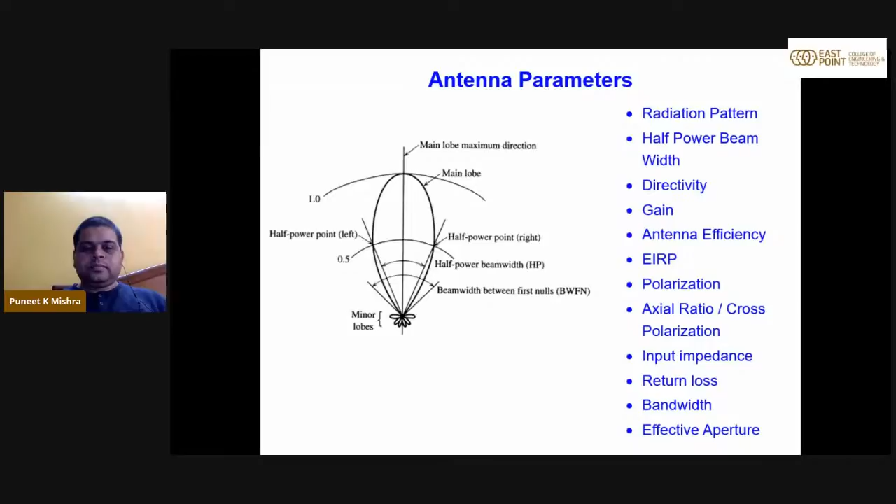Another very important definition is polarization of a wave. Polarization is important in a space antenna system because when defining polarization on ground, it is the instantaneous vector of the electric field. When it is parallel to the earth, it is called horizontal polarization. When it is vertical to the earth, it is called vertical polarization. But when this instantaneous vector of the E field generated from the antenna is parallel to the equator, it is called horizontal polarization in space, and when it is perpendicular to the equator, it is called vertical polarization in space.

So when mounting these antennas on the satellite, the reference for defining polarization is very important. We have to see how my antennas will be located with respect to equator when the satellite is in orbit, and how my launching probe will be there with respect to equator. Accordingly, we have to define the polarization ports on the antenna. And suppose by any chance polarization is reversed — H becomes V or V becomes H — then the entire satellite cannot be used. Why? Because the International Telecommunication Union (ITU) assigns the same frequency to two different users in opposite polarization.

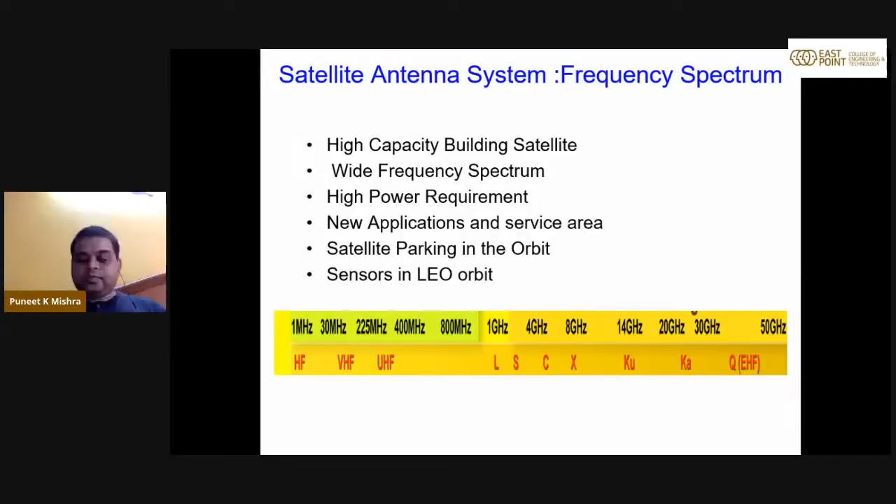So what are the challenges and opportunities in satellite or space antenna systems? First, we have to take care of adequate bandwidth, frequency range, and immunity from fabrication tolerances. You can design your antenna very nicely, but if the dimensions are such that you cannot implement them mechanically, there is no point to such a design, because ultimately you have to fabricate and fly the antenna. So any antenna or microwave engineer should be a good mechanical engineer too, or at least have the capability to grasp mechanical requirements. You should work with your fellow mechanical or fabrication engineers to know what tolerances and dimensions are achievable, and what kind of design is possible from the fabrication facility available in your lab, outside lab, or within India.

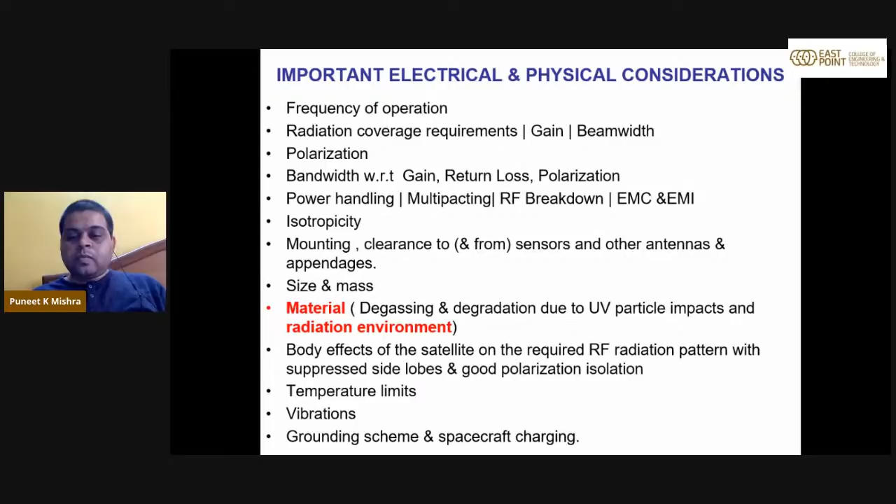Next slide, please. Yeah, most of this I have covered. You can go to the next slide. This portion is also covered. Yeah, you can go to the next slide.

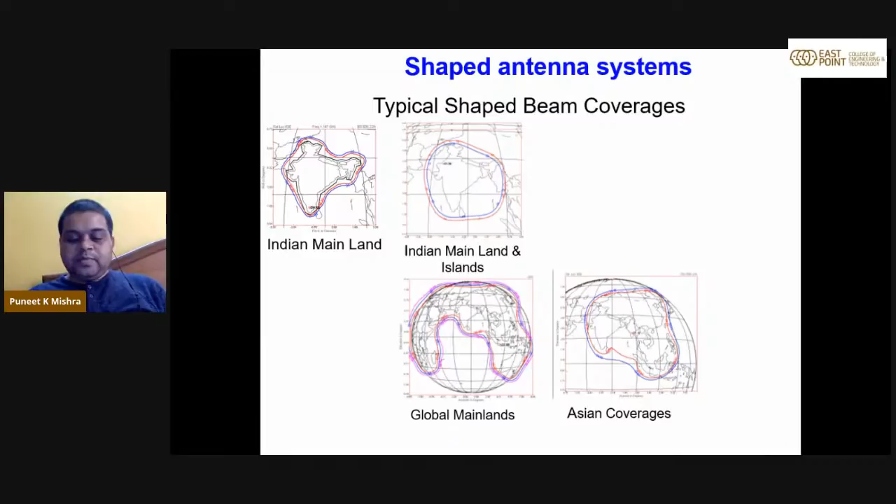Next slide, please. Now coming to how this shaping is achieved, how we are able to generate these shapes.

One should know that these shaped contours can be created by three different schemes. The first scheme is a single parabolic reflector with multiple feed networks and a beamforming network. The second technique is a direct radiating array antenna with a beamforming network. The third technique is a shaped reflector antenna with a single feed. Out of these three schemes, we have chosen the third one, because the first two techniques require a huge amount of RF hardware as well as expensive phase optimization techniques.

In space, we want to really reduce the number of hardwares as well as complexity. So we have chosen the third option, which is very simple: shaped reflector antenna with single feed. Only one feed is used, so only one RF chain is required. Complexity comes in the generation of this shaped reflector, which we have mastered now, and we are really able to shape any footprint we want. Once we achieve this, the entire RF electronics or electronic portion becomes very simple. So the third option we have used.

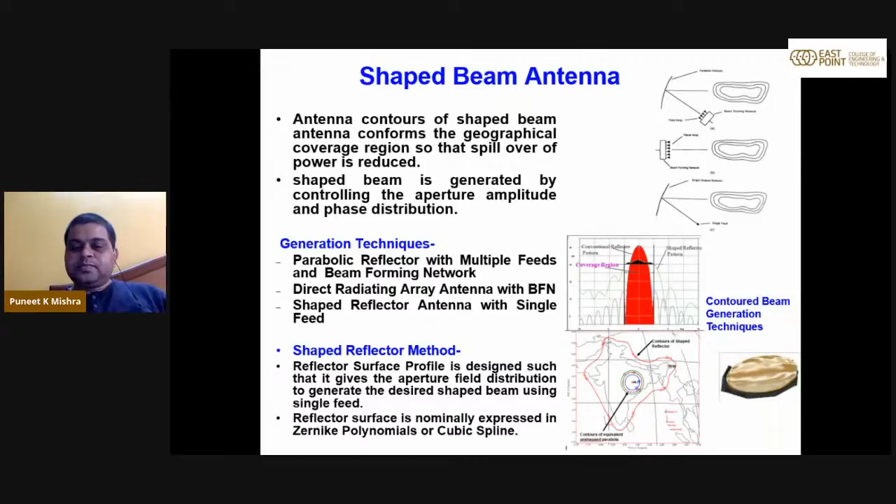Now coming to multiple beam antenna systems. The basic concept is that for any reflector there is an optical arrangement. If you put a feed at the focus of the reflector and transmit energy from the feed to the reflector, it reflects back and the plane wave energy is created in the far field, and accordingly you can generate the footprint. But if you laterally displace the same feed left, right, top, or bottom, you can shift the position of the beam.

So at the focus of this subreflector, one beam is generated. Another feed is positioned by offsetting from the focus in the lateral direction, and using this method we are able to create multiple beams using multiple feeds.

For generating multiple beam antennas, we need a feed cluster, used to generate multiple beams. Multiple beam antennas are a recent trend in communication satellite technology. They provide efficient frequency spectrum utilization, multi-fold reuse of frequency, higher EIRP, as well as higher G by T, making the user terminal very compact.

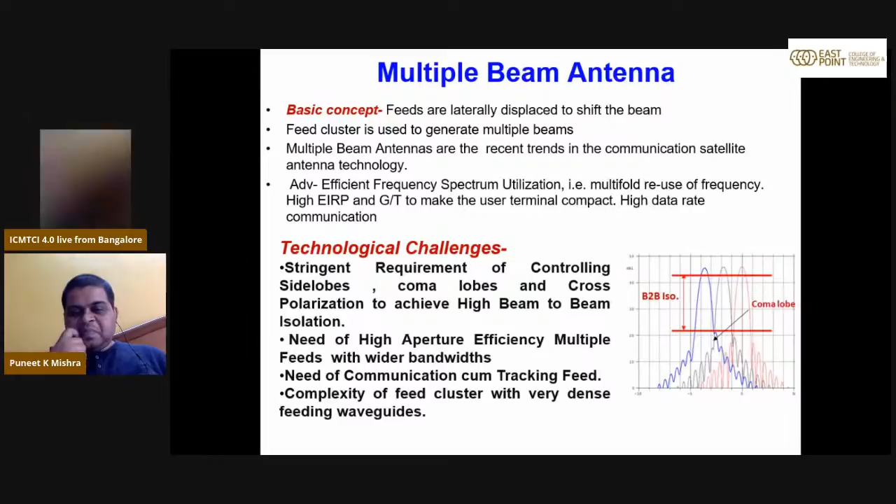You can see that for multiple beam antennas, a complex feed network is required. To cover entire India, we have 5 different feeds.

With these 5 different feeds, we need 10 different waveguide routings, since 5 are required for the transmit chain and 5 for the receive chain. For the multiple beam KU band antenna, this is the typical structure of the feed as well as beam waveguides. Next slide, please.

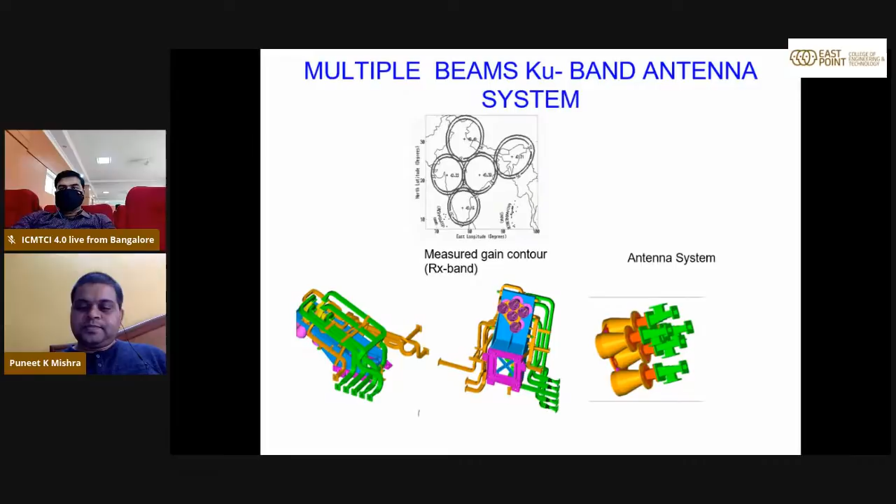Now I will slowly touch upon how we characterize these antennas, starting with an introduction to the antenna radiation regions. Microwave or antenna engineers will already know this, but for others: when any RF energy is transmitted from an RF source, initially it is spherical in nature. As it propagates it becomes cylindrical, and further out it becomes a plane wave.

In the immediate vicinity of the antenna, the fields are predominantly reactive in nature. Then in the Fresnel zone, between lambda by 2 pi and 2d squared by lambda, they are radiating near field regions, called the Fresnel zone. Once the distance crosses 2d squared by lambda, that is called the far field region or Fraunhofer region. The requirement is that the distance from the RF source is 2d squared by lambda, where d is the maximum aperture or diameter of the antenna, and lambda is the wavelength at which the antenna is designed.

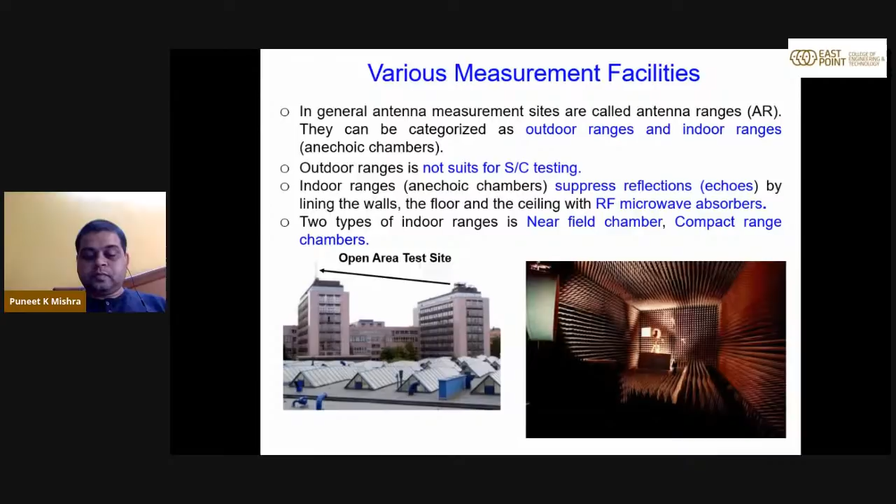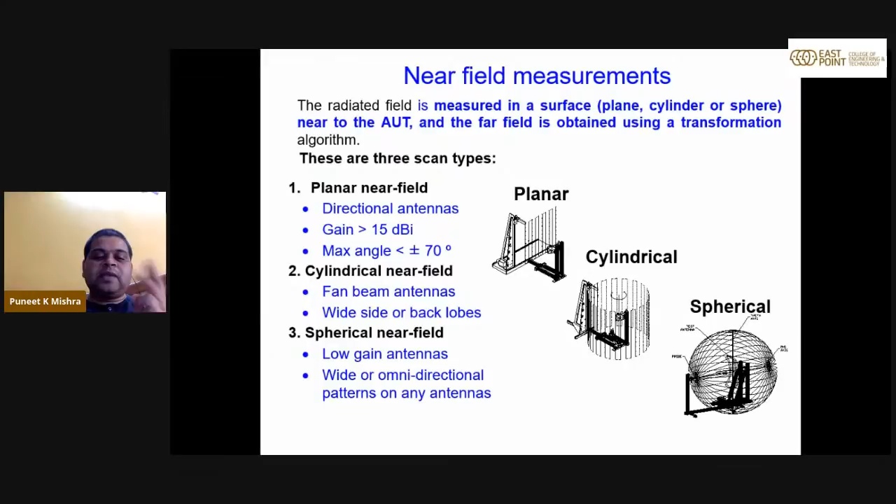Then there is another important facility called the near field facility. There are three types of near field measurement facilities. When you are measuring your test antenna and the measurement probe, they are very close to each other - they are in the near field region. When you perform measurement this way, it is called near field measurement. You can perform this measurement in three types: planar near field, cylindrical near field, and spherical near field.

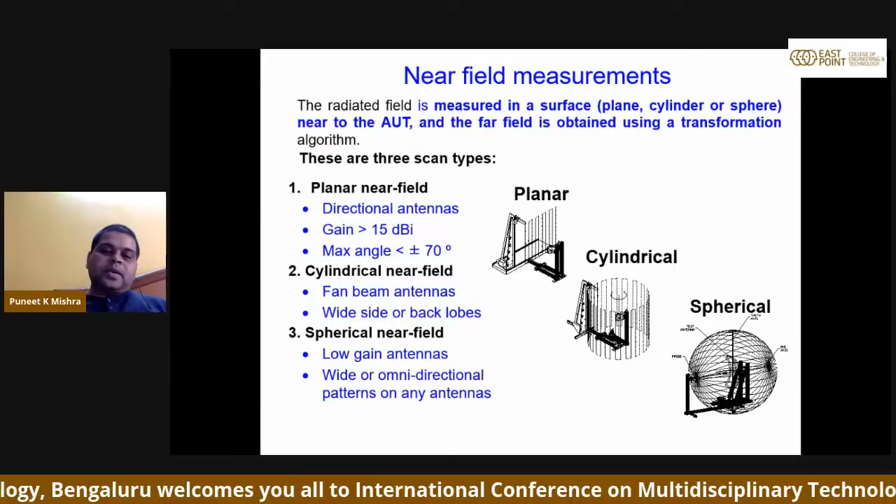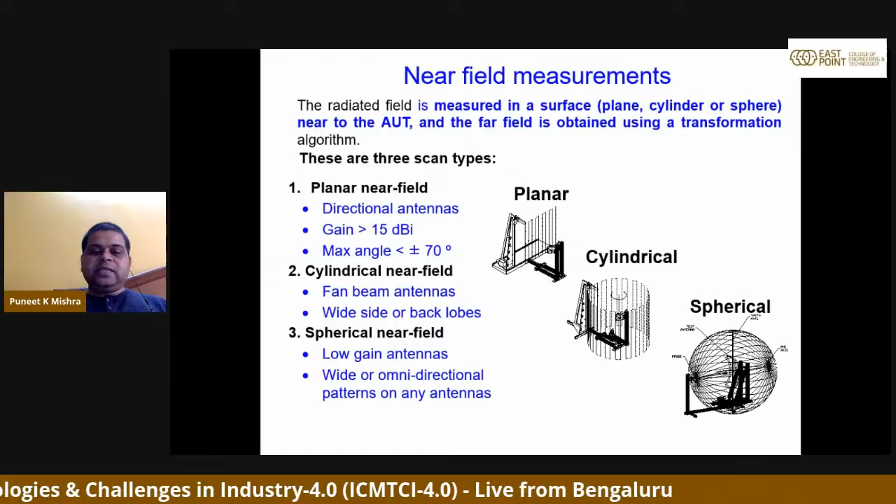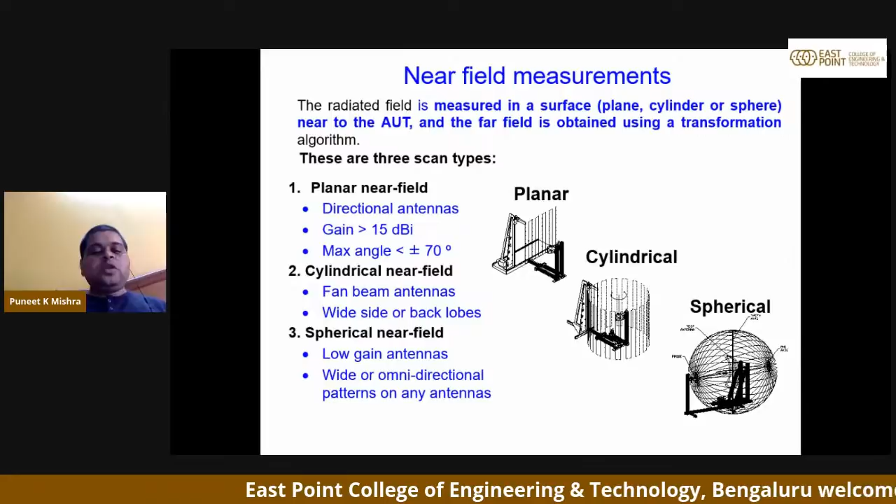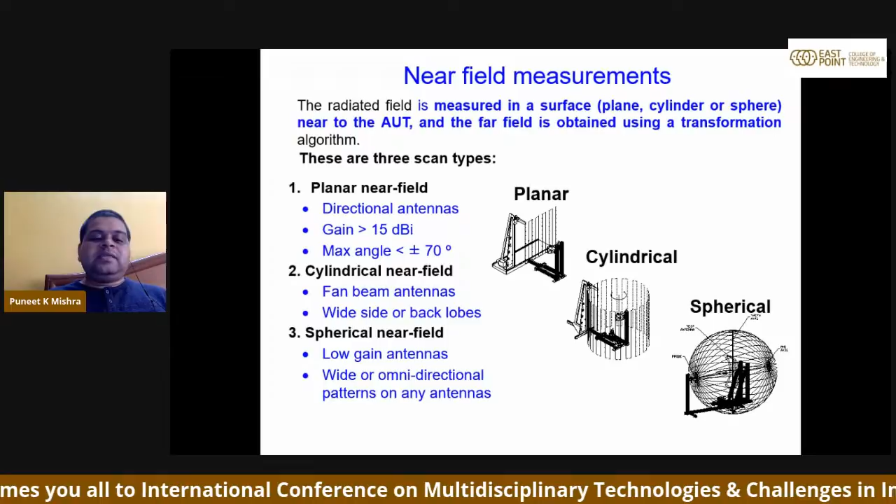Depending upon use, if you are trying to measure directional antennas having gain of 15 dBi and beyond, you can use a planar near field, but you can measure a maximum of plus minus 70 degrees. For fan beam kind of antennas where you have wide side lobes or back lobes, you can use cylindrical near field. You can use spherical near field mostly in the case of low gain antennas used in satellite applications - we call them omnidirectional antennas. So there we use the spherical near field facility.

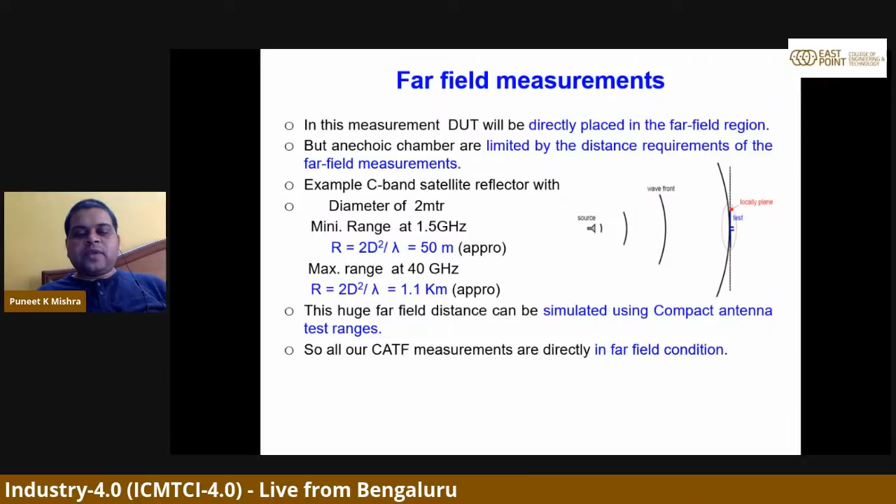Now coming to the far field - this we will skip, as I have already explained it.

Mostly for satellite applications, we use the compact antenna test facility, or compact range, as it's popularly known. Why the name compact range or compact antenna test facility? Because we are creating a far field condition which is 2D squared by lambda. To give you a perspective, for a Ku band antenna, a 2 meter Ku band antenna, if you calculate the far field condition, it comes out in kilometers. This means for an antenna we're designing, suppose a 2.2 meter reflector in Ku band, we need a facility that is 1 kilometer or few kilometers, only then can you characterize it.

Now coming to space related activities - when you are in geostationary orbit, which is 36,000 kilometers from the ground, you design any antenna of any dimension at any frequency, and you will always be in the far field. This facility creates the same kind of far field in a small area or volume of 30 meters by 20 meters by 16 meters. That's why this facility is known as the compact antenna test facility.

In our facility, till now we have tested 45 satellites, and I was part of all these 45 satellite characterizations - more than 275 antennas, in fact now 280 and more antennas and radomes. In this facility, we perform polarization verification. Whatever parameters I have discussed are important for antenna design - all those things are characterized: polarization verification, pattern, beam shape, spacecraft body, EIRP (effective isotropic radiated power), saturation flux density, gain over temperature, PIM (passive intermodulation), auto compatibility, and tracking. So all these things we are able to characterize in this facility.

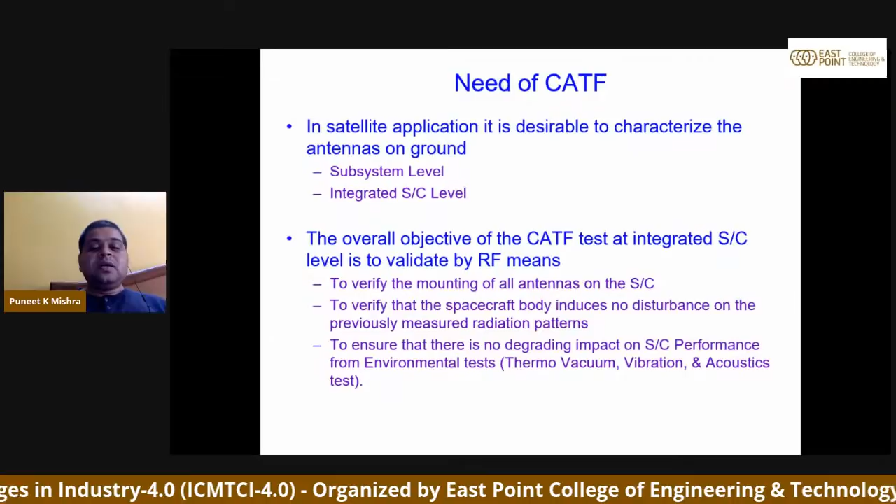Three important things explain why we need this characterization at spacecraft level. Number one is to verify the mounting of the antennas on the spacecraft. Number two, to verify the spacecraft body induces no disturbance on the previously measured pattern. Number three, to ensure there is no degrading impact on the spacecraft performance from environmental tests.

The first one again I will explain: to verify the mounting of all antennas on the satellite. When you launch a satellite into geostationary orbit, the satellite will always look towards the equator. But India is at 22 degrees north of the equator. When the satellite looks towards the equator, the antennas will also look towards the equator, and then you cannot communicate with India. To communicate with India, it is required that even though the satellite is looking towards the equator, the antenna should look towards India, meaning 22 degrees north. This kind of tilt is required on board so the antenna can look towards India.

This tilt is mechanically provided using some kind of shims, and it is aligned mechanically. But RF-wise performance cross verification is required, because we have to really see whether this 22 degrees given mechanically is really 22 degrees, or 21, or 20 degrees. That's why RF characterization and plotting the measured pattern on the globe will tell us whether the antennas are really aligned properly or not.

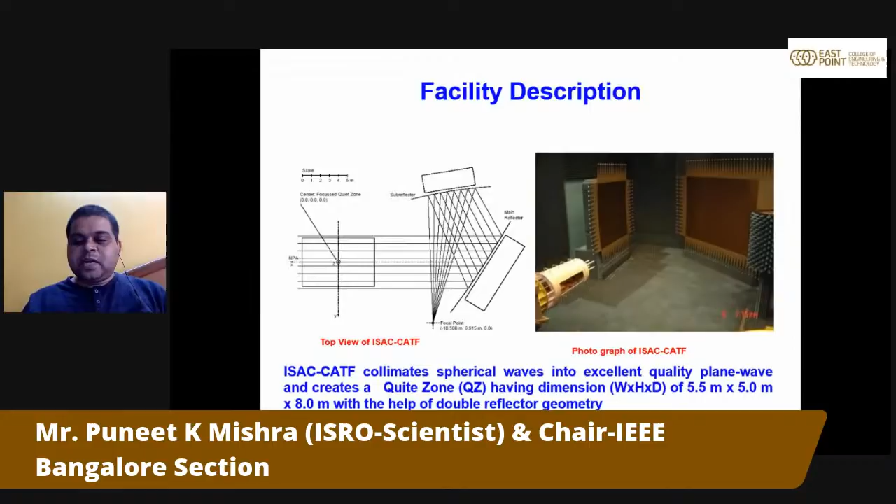When facility description is considered, you can see amplitude taper less than 1 dB, phase taper less than 5 degrees, cross polarization 38 dB, shielding effectiveness 80 dB, frequency up to 200 gigahertz we can do, but presently we are utilizing up to 40 gigahertz because of our RF instruments.

We are having a very accurate positional system of the order of 0.01 degree, because when we are trying to characterize antennas with beam width of 0.6 degree or 0.5 degree, we need angular precision of that order. We have to test a satellite, so we have a heavy duty positioner up to 6000 kg which we can mount on that.

Receiver sensitivity is minus 110 dBm, because we will be dealing with really low power.

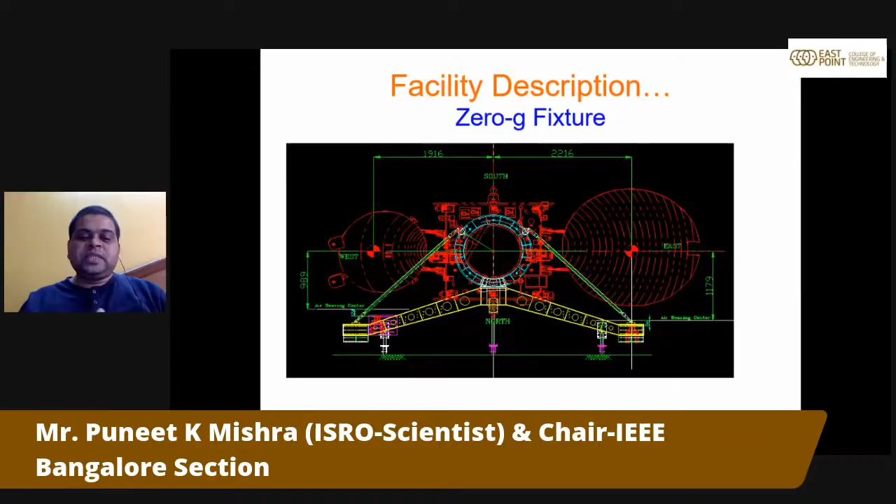This is the fixture, called zero-g fixture. With this fixture, we are able to create microgravity. You can see these are the deployable antennas on the satellite structure. We know the mass of this antenna and the CG line passing through it. Using the concept F equals mg, thrust can be applied at the CG line, creating a weightlessness condition called microgravity. This is the concept we have used, and we have indigenously developed this structure so that for various satellites we can create microgravity on ground.

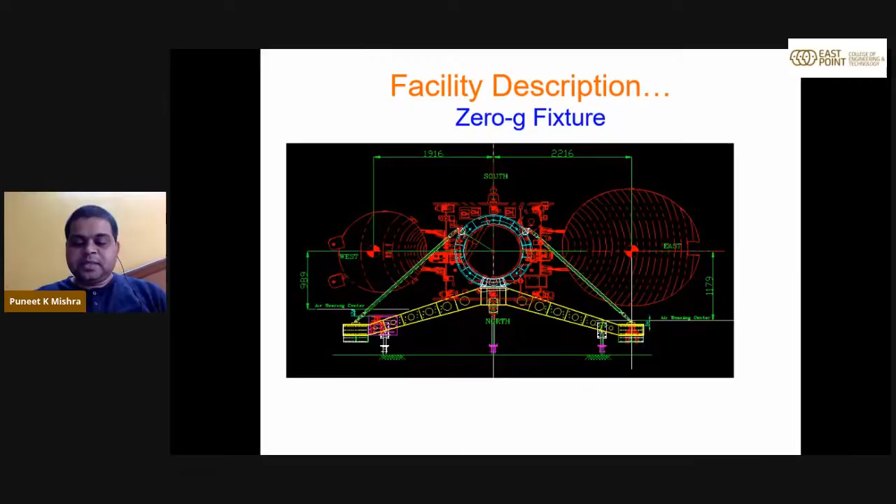Now coming to how we are measuring the radiation pattern using grid patterns, microgrids. To cover India, we need -5 to +5 degrees azimuth, and elevation wise -3.5 to +3.5 degrees. Then we are creating a raster scan, and I will show you how the pattern looks.

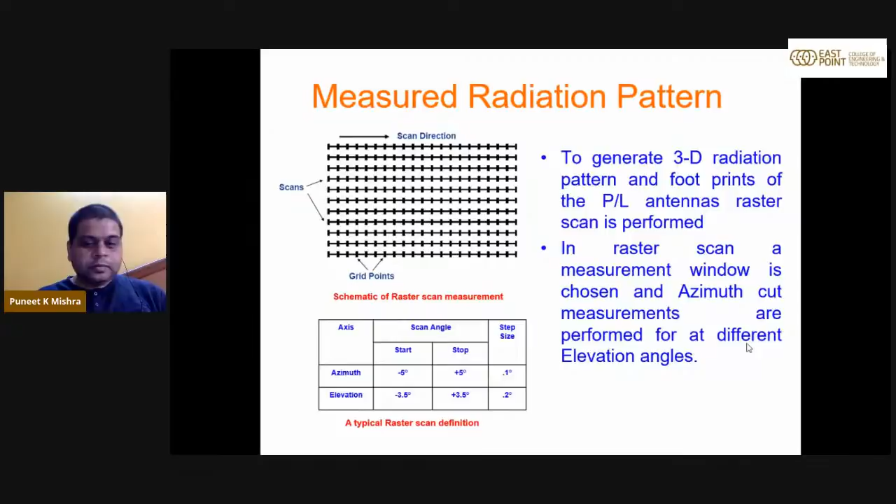This has drastically reduced the requirement of in-orbit testing, which initially used to take months together. Now we are finishing the IOT measurement within 1 week, because we take some sample measurements and match them with the measured results in this facility, and if they are matching, we declare the satellite operational.

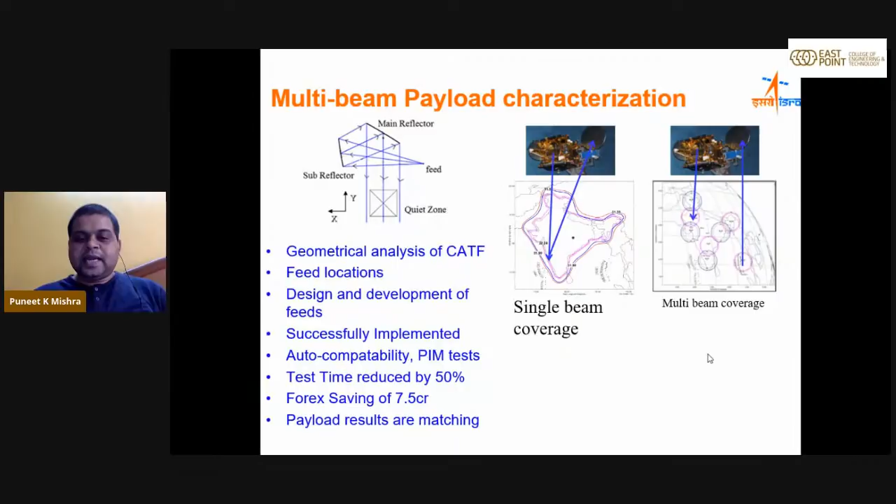You are muted, we are not able to hear you. Sir, thank you so much, sir. Thank you. We'll take some questions.

Yes, I will be more than happy to take questions. That's why I finished 5 minutes before. Yeah, we have seen you very much on time, and all the slides had a lot of descriptions with it. Wonderful, sir.

Sir, I could see one question on the screen which Dr. Ashok Shukla sir has asked. Can you see the screen, the question on the screen, sir?

The question is which type of material or coatings are applied on the outer surface of spacecraft for EMI shielding in space. For EMI shielding, we are not applying any coating. What we are trying to do is use 3 aluminum thick plates so that we are able to restrict most of the interference which is from the nearby object or from outer space. We have optimized this, because more than 3 layers, the amount of advantage we get is not much. So this is the optimized number we put in all the places wherever there is a gap or an opening. All those areas are covered with this 3 thick aluminum sheet.

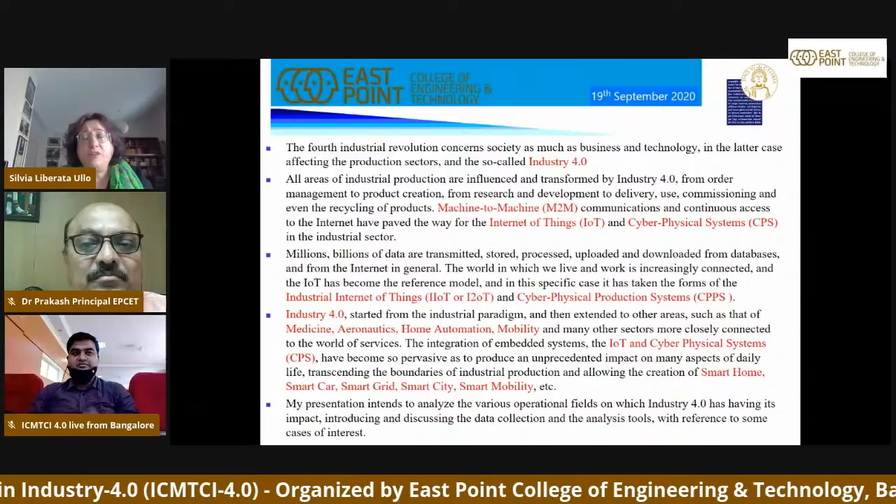The fourth industrial revolution, as we know, concerns society as much as business and technology, and in this latter case, affecting the production sectors and what is called Industry 4.0. All areas of industrial production are influenced and transformed by Industry 4.0, from order management to product creation, from research and development to delivery, use, commissioning, and even the recycling of products. Machine-to-machine communications and continuous access to the internet have paved the way for the Internet of Things, the so-called IoT, and cyber-physical systems in the industrial sector.

Millions, billions of data are transmitted, stored, processed, uploaded, and downloaded from databases and from the internet in general. The world in which we live and work is increasingly connected, and the Internet of Things has become the reference model.

And in this specific case, it has taken the forms of the industrial Internet of Things and the cyber-physical production systems. Industry 4.0 started from the industrial paradigm and then extended to other areas, such as medicine, aeronautics, home automation, mobility, and many other sectors more closely connected to the world of services.

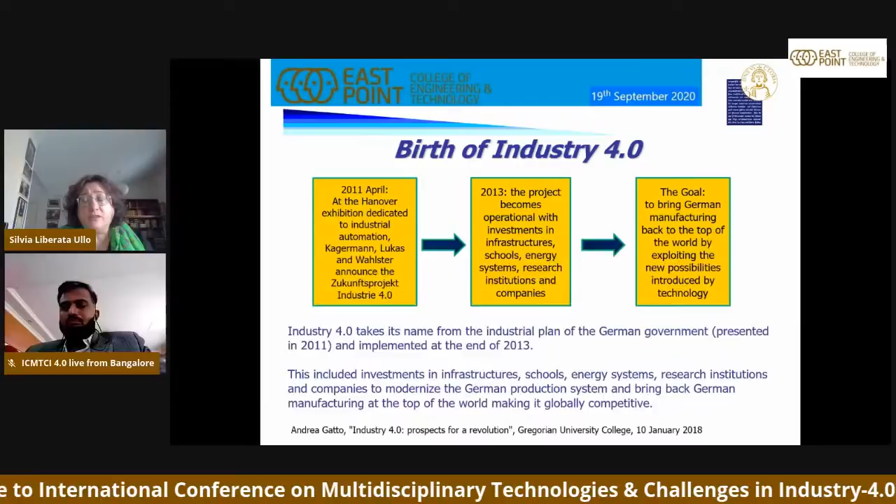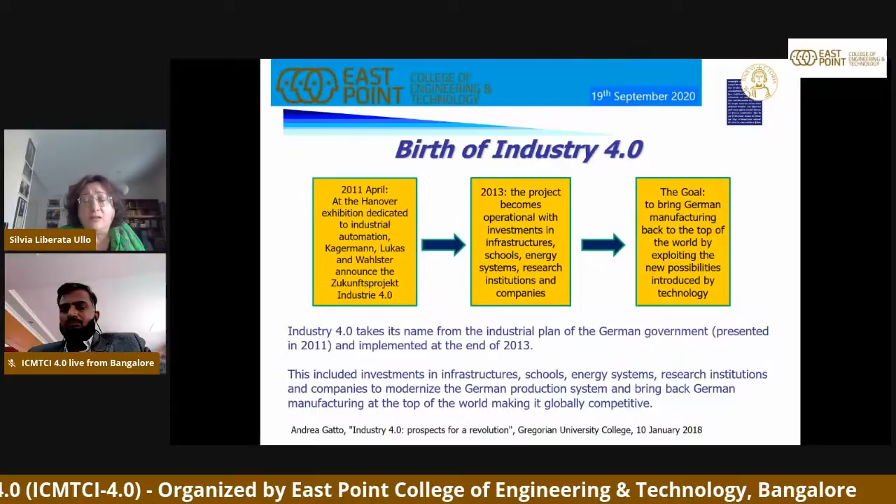So what happened in those years was that many countries in Europe and all over the world tried to imitate what the German government was doing. The idea, the goal of the German government, was to bring German manufacturing back to the top of the world by exploiting the new possibilities introduced by the technology that was growing at that moment.

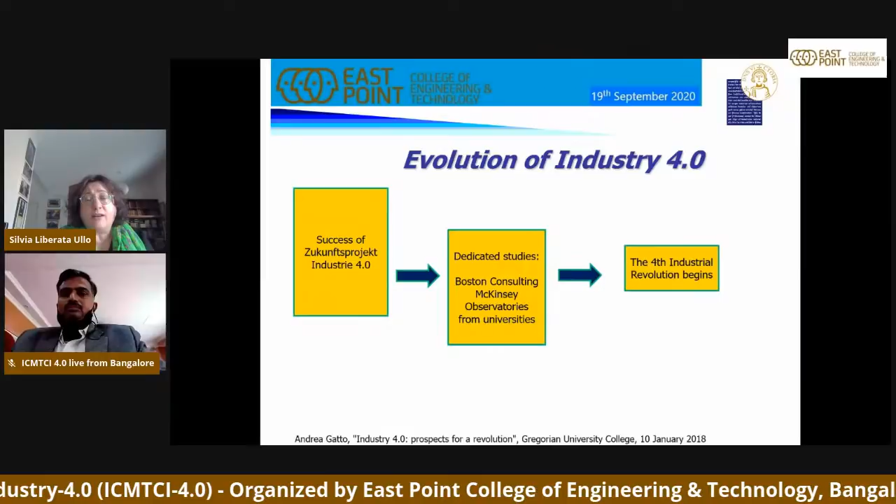So the evolution of Industry 4.0 started from the success of this project born in Germany called Zukunftsprojekt Industrie 4.0, and there were very dedicated studies from consulting companies and universities to move to the fourth industrial revolution. The fourth industrial revolution begins.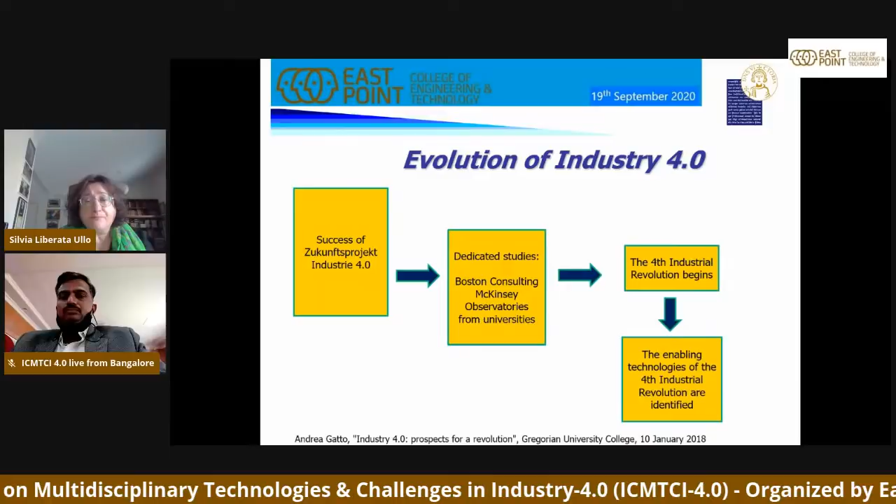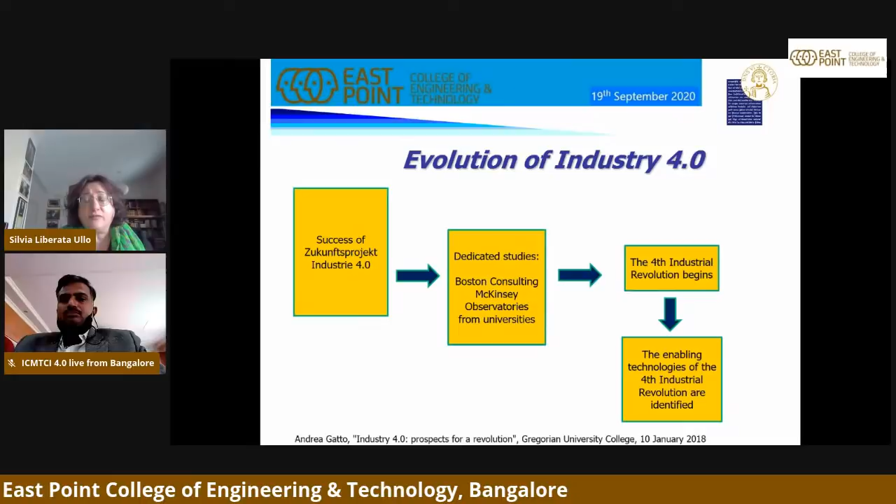I will share my presentation. Since I don't want to go ahead of my time, I prefer to take some hints from each slide, but here you can find all the particular details of these enabling technologies.

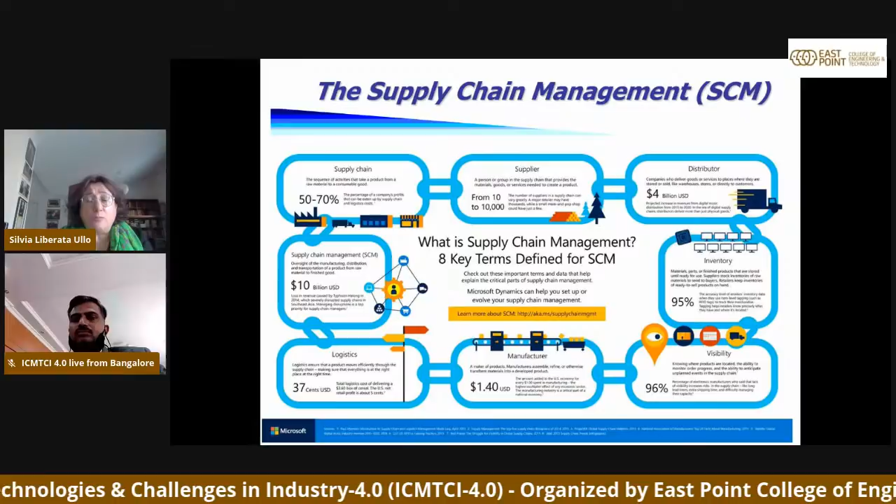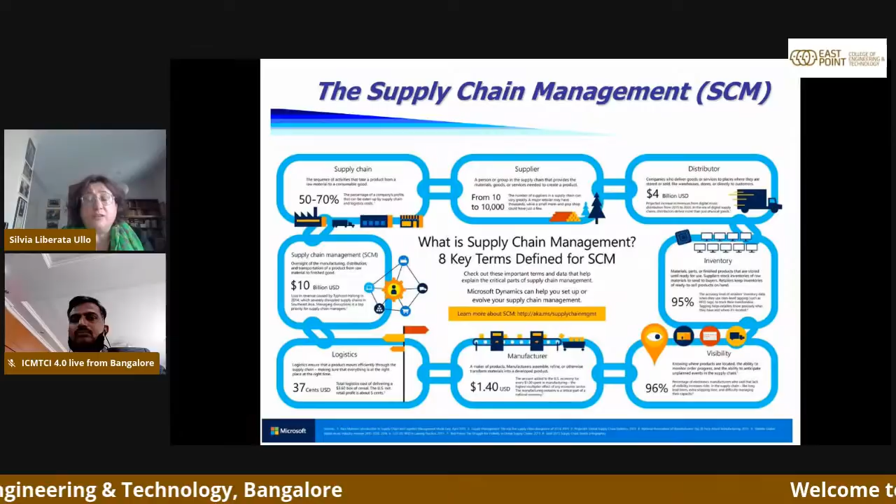Just to say that all these key elements had to adopt enabling technologies if they wanted to move toward the process and development highlighted by Industry 4.0.

The set of enabling technologies must lead to creating a competitive advantage in terms of Industry 4.0. The main objective of Industry 4.0 is to improve the perceived quality of products based on customer feedback and customer satisfaction, thus optimizing the related industrial processes, increasing their flexibility, speed, productivity, and quality.

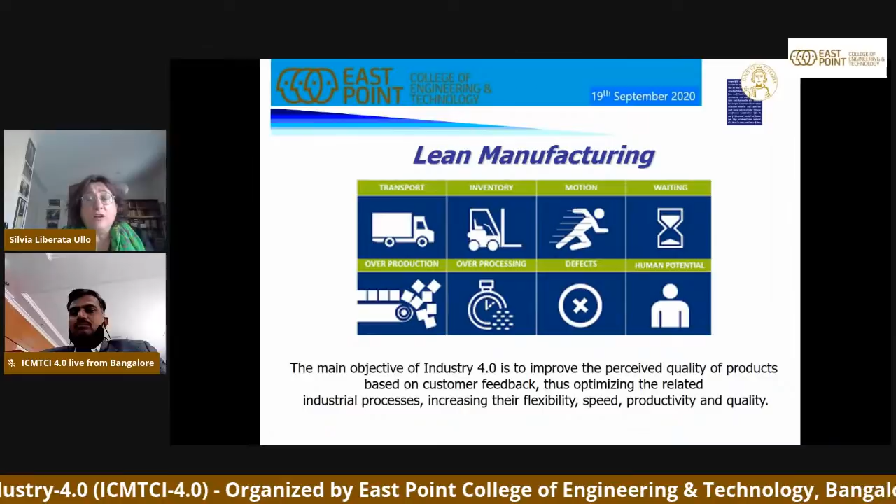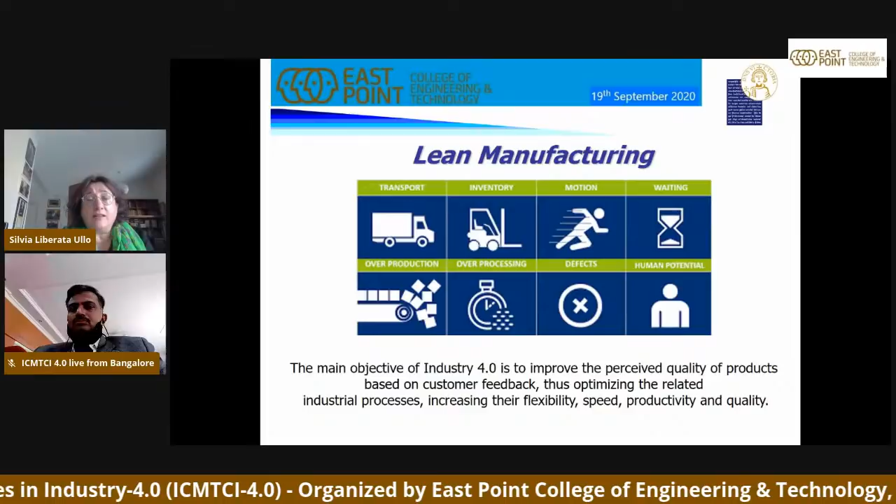This is the reason why all 8 key elements in the slide before are important. They all together must participate in the process. Here we have an example of what is called lean manufacturing, and all the processes of transport, inventory, waiting time, defects, quality monitoring and so on are part of the lean manufacturing aspect. Lean manufacturing is strictly related to lean management through investigation, instruction, tool controls, qualification of specific personnel, measurements, calibration, inventory, and all these activities represented here.

What was important in the Industry 4.0 process was realizing a particular aspect that was not possible before, when the technology was not ready to allow this. The real key factor has been - and now this is the present, not the future - the digitalization of the processes for the creation of what are called digital twins of production processes. What became necessary was to overcome the phase in which the goal was to make vertical efficiency sub-process by sub-process, but the realization of the fourth industrial revolution instead involves the integration of individual business processes along the entire value chain.

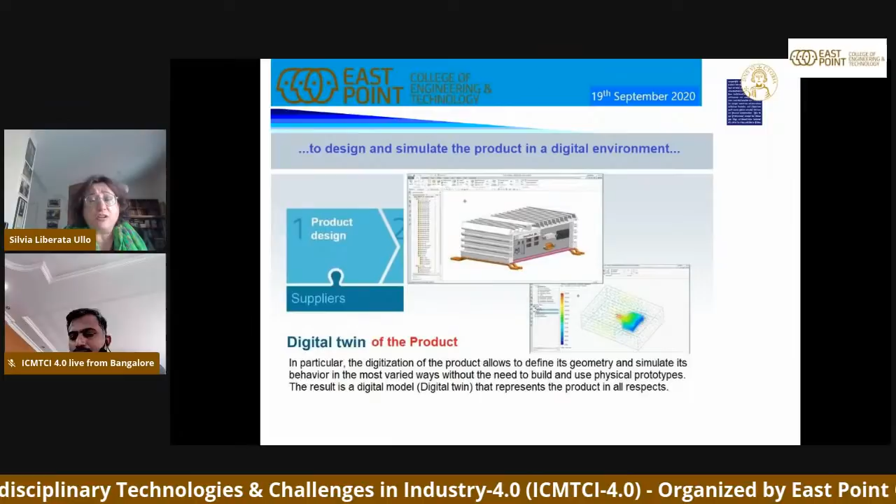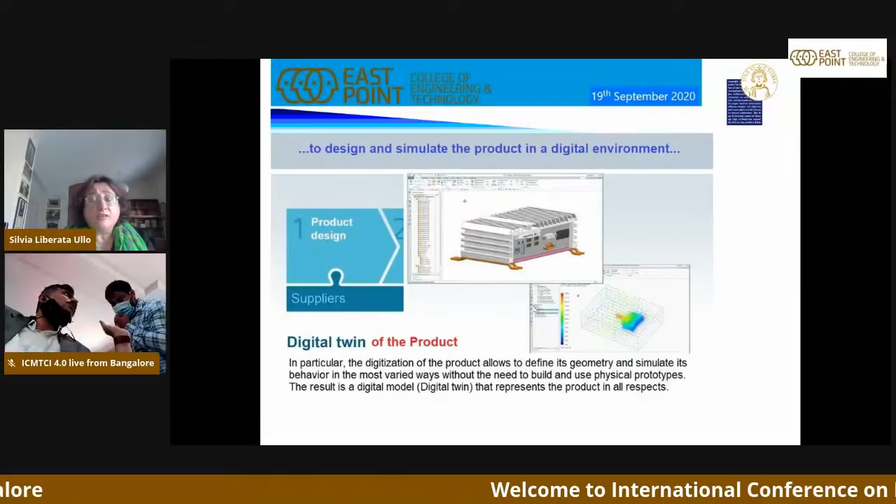So this slide is related to making a digital copy of the reality to work on in advance, to anticipate what was going to happen in the production chain. So what happens? Industry 4.0, especially in the production field, was able to give some guidelines, for instance to design and simulate the product in a digital environment - this is what is called the digital twin of the product.

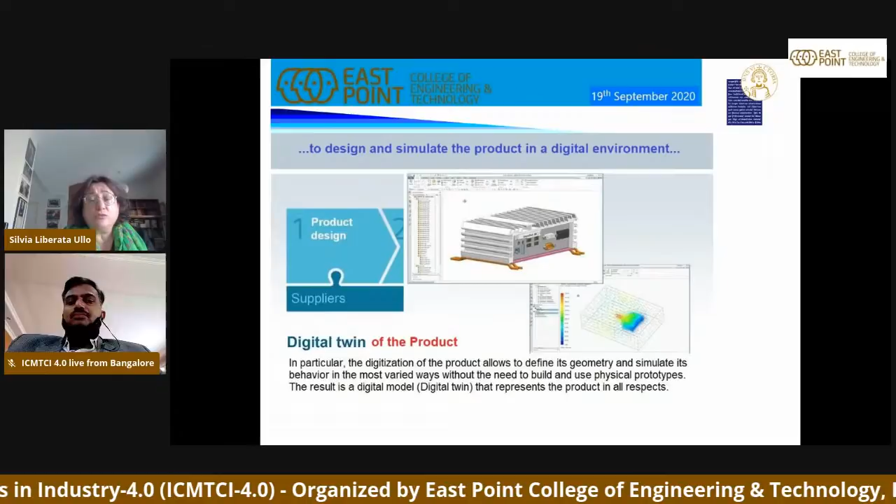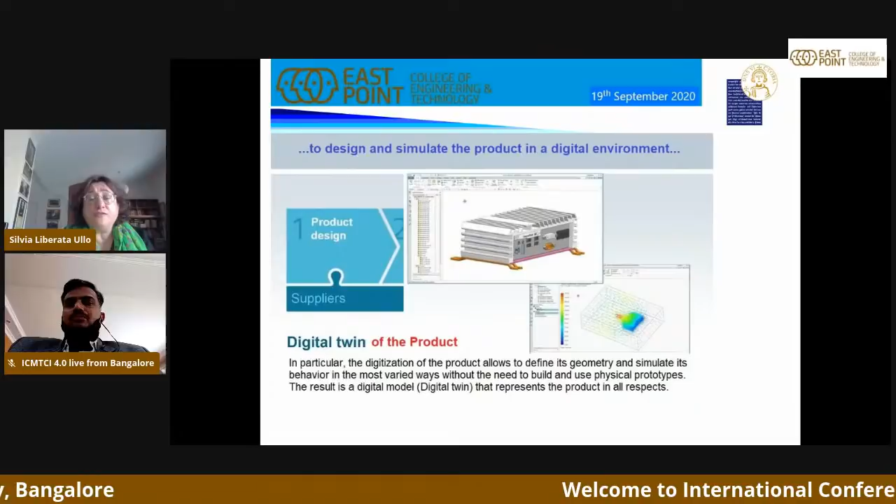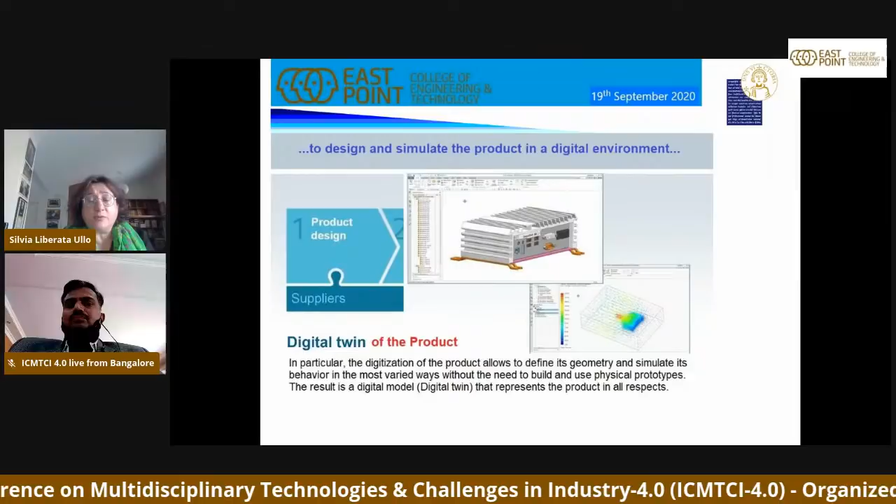Some examples are in this slide. The digitalization of the product allows us to define its geometry and simulate its behavior in the most varied ways without the need to build and use physical prototypes. Perhaps the workers, after measurements, realize that the first prototypes do not fit the standards, and so they have to come back. In this case, the digitalization of the product allows checking everything before the production.

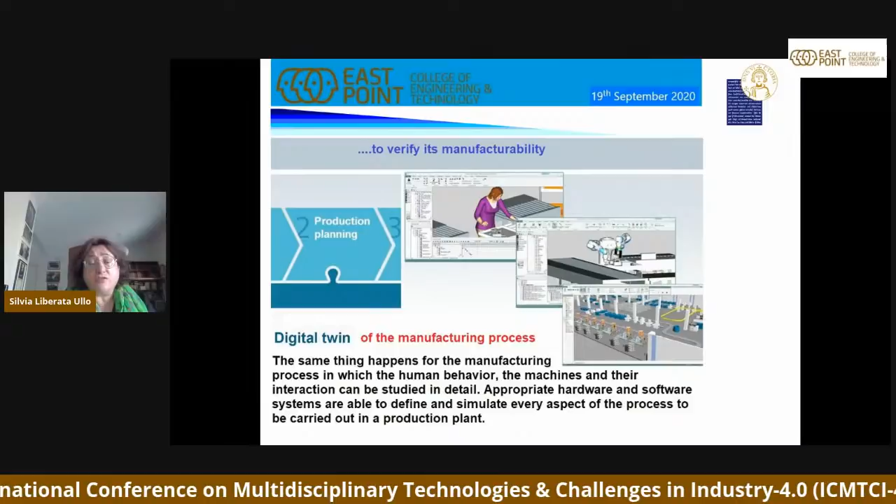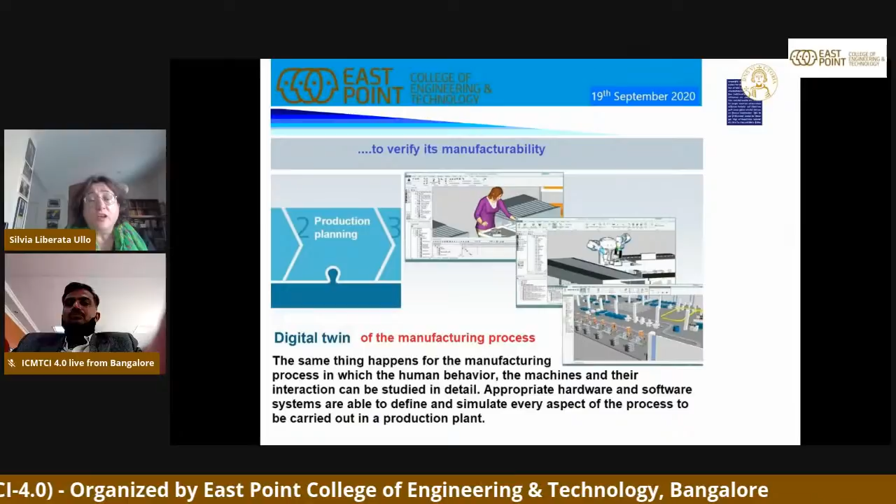So the result is a digital model, what is called digital twin, that represents the product in all respects. Together with this, there is the other aspect of the so-called digital twin of the manufacturing process to verify its manufacturability. The same thing happens for the manufacturing process, in which the human behavior, the machines, and their interaction can be studied in detail in advance. Appropriate hardware and software systems are able to define and simulate every aspect of the process to be carried out in a production plant.

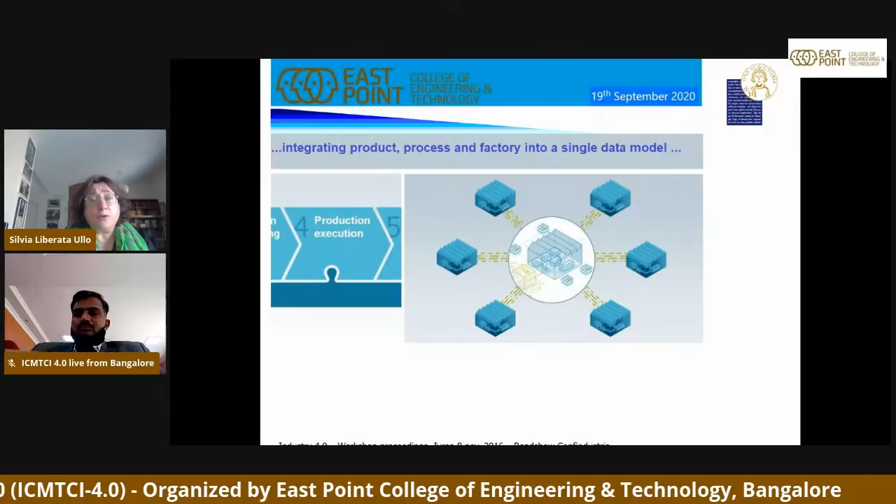And the digital twin of the factory - engineering the factory modification, how the factory must be changed and improved to make all the processes and the production work and be successful. So we integrate product, process and factory into a single data model. This is the goal of the full production execution process. All real production and field data are available and contribute to updating the digital product process model in this life cycle and data analytics.

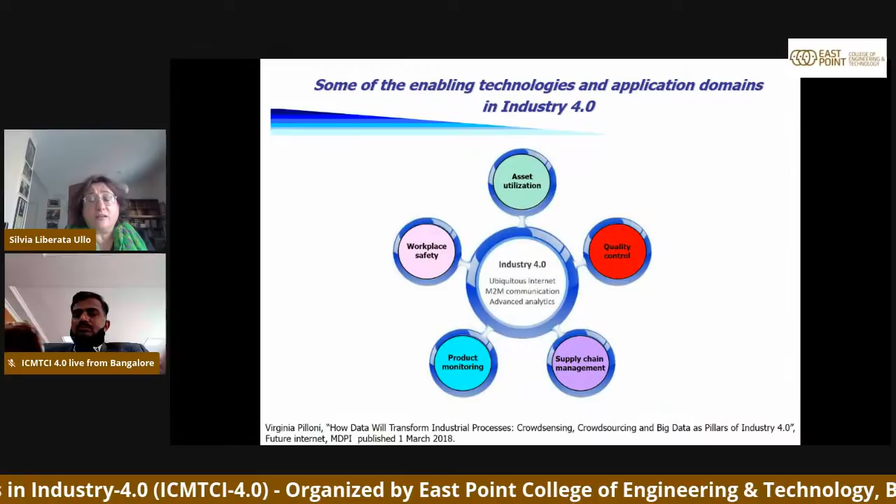So what happens is that in Industry 4.0, we have together some particular main aspects like ubiquitous internet, machine-to-machine communication, advanced analytics, but all around there are some particular domains that must be underlined, like asset utilization, workplace safety, quality control, supply chain management, and product monitoring. These are the domains of Industry 4.0 with the details related to each of these aspects.

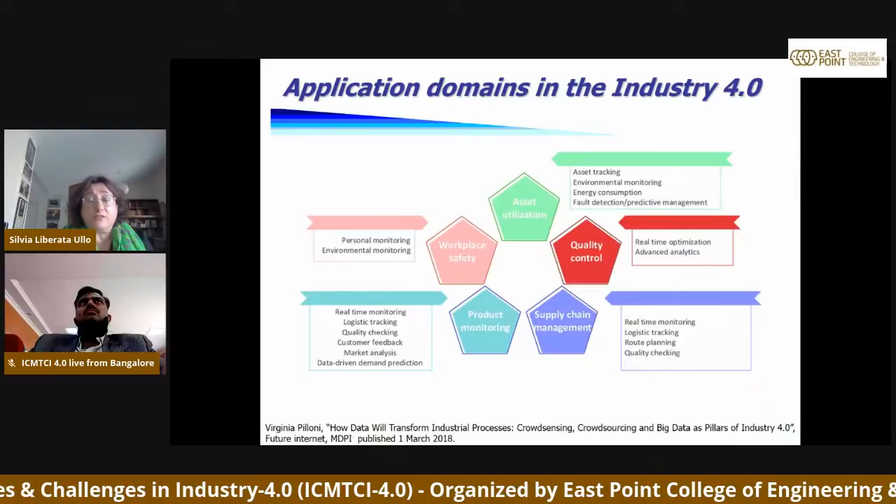For instance, let's take supply chain management. This means taking into account real-time monitoring, logistic tracking, route planning, and quality checking. Just looking at these elements, we see how logistic tracking and route planning are very important in supply chain management. I highlighted these aspects because I will focus my case study on something very related to this, as we will see in a few slides.

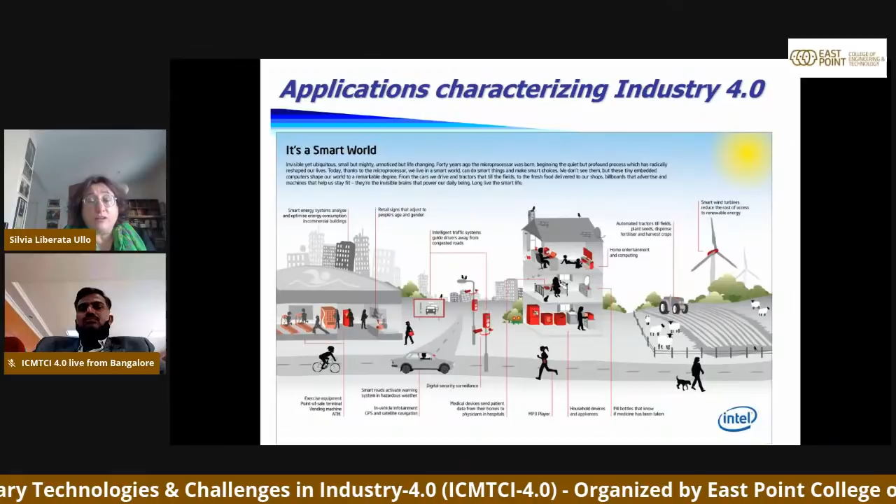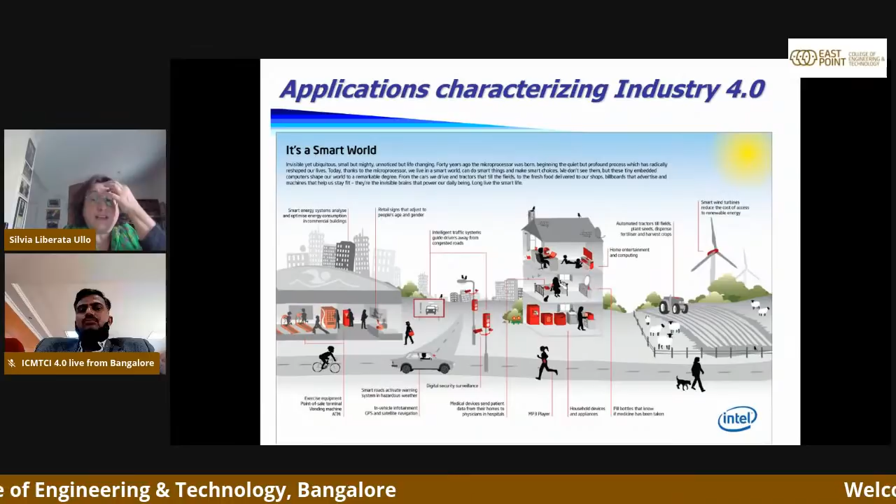This is a complete smart world scheme in which everything in a smart city can interact, from buildings to people in cars, people jogging or just walking, people at work or in their houses, or farmers. So everything can be connected through smart devices and through the internet, with a connected network which puts all the data collected by the sensors together.

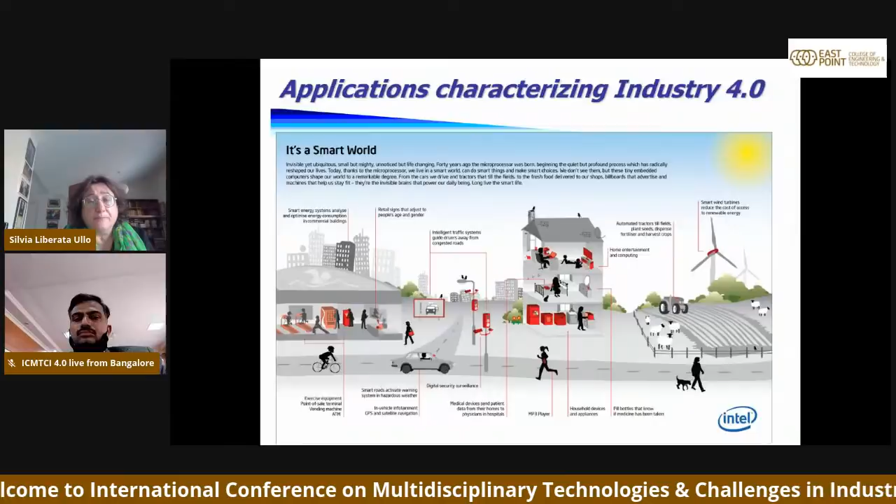So the main challenges are the data challenge: new requests for archiving, processing, and managing data, new algorithms, model visualization techniques, increased standardized approaches, and reduced redundancy. These are all big challenges related to data storage and processing.

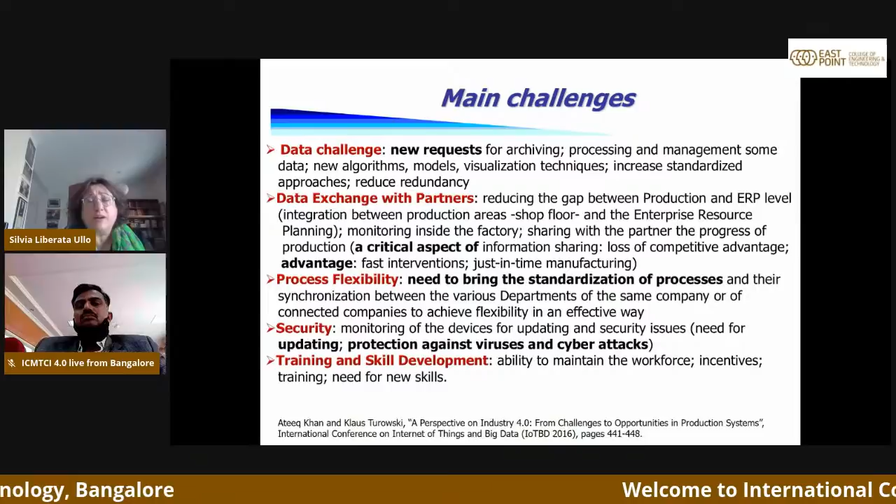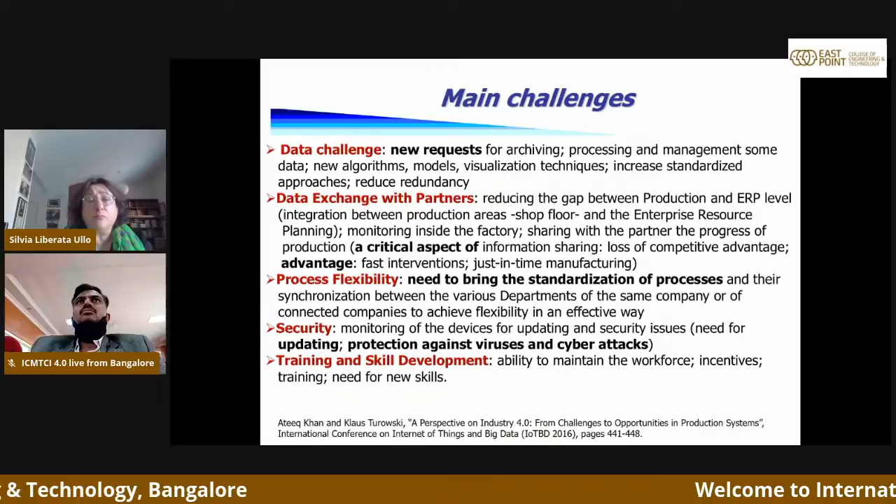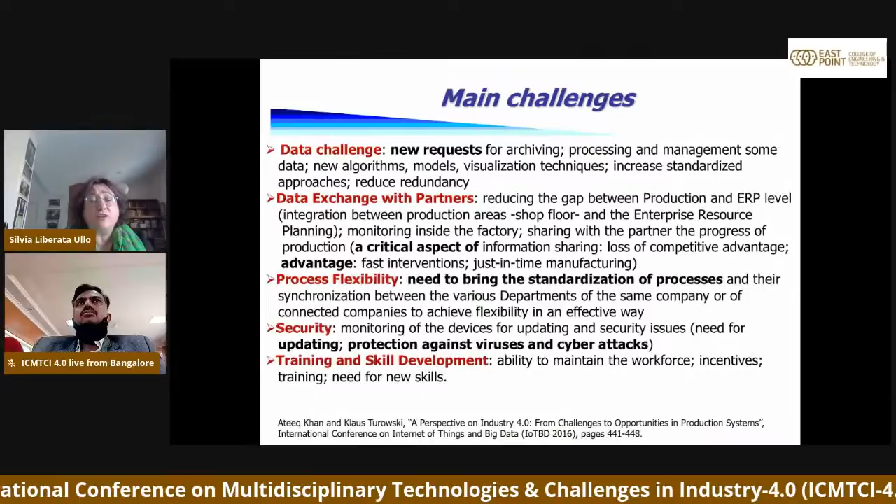Another challenge is data exchange with partners, to reduce the gap between, for instance, production and the ERP, the so-called enterprise resource planning level, to monitor data inside the factory and share the production process with partners. This is another critical challenge of information sharing, because not being able to do this effectively means loss of competitive advantage. Instead, being able to exchange data efficiently means fast intervention, just-in-time manufacturing, and success in today's industry fields.

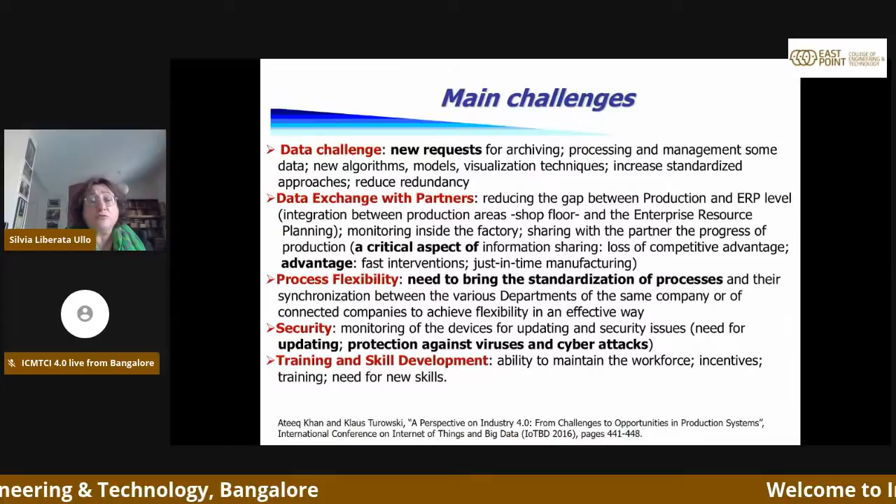Another challenge is process flexibility. It's important to bring standardization of processes and their synchronization between the various departments of the same company, or of connected companies, to achieve flexibility effectively.

All these challenges are related to another important challenge, which is security: monitoring of devices for updating and security issues, and the need for updating and protection against viruses and cyber attacks.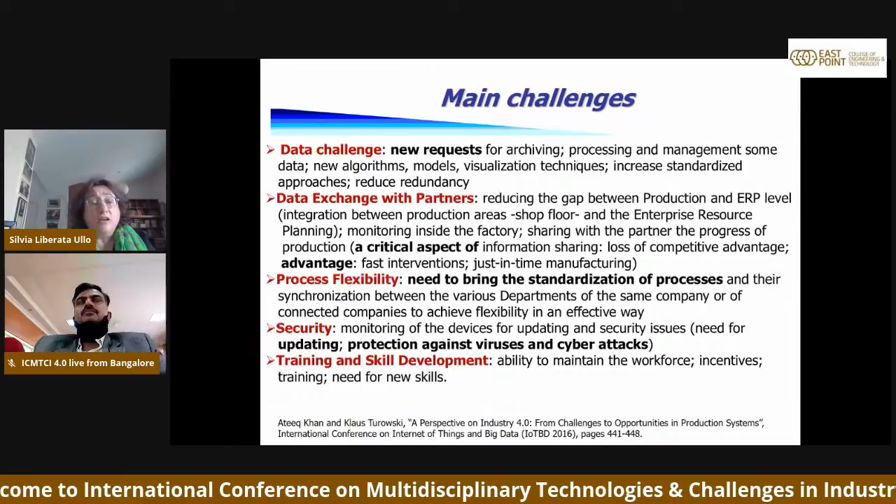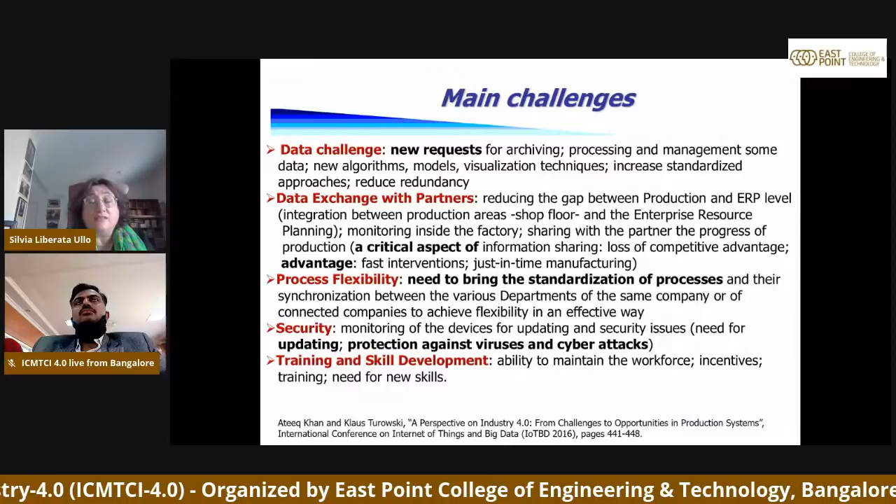Training and skill development is the last but not least challenge, related to the ability to maintain the workforce, create efficient incentives and training, and address the need for new skills. From Industry 4.0, training and skill development is a natural consequence, because what became clear was the need for new jobs. So the future of jobs, skills, and workforce for the fourth industrial revolution became completely new.

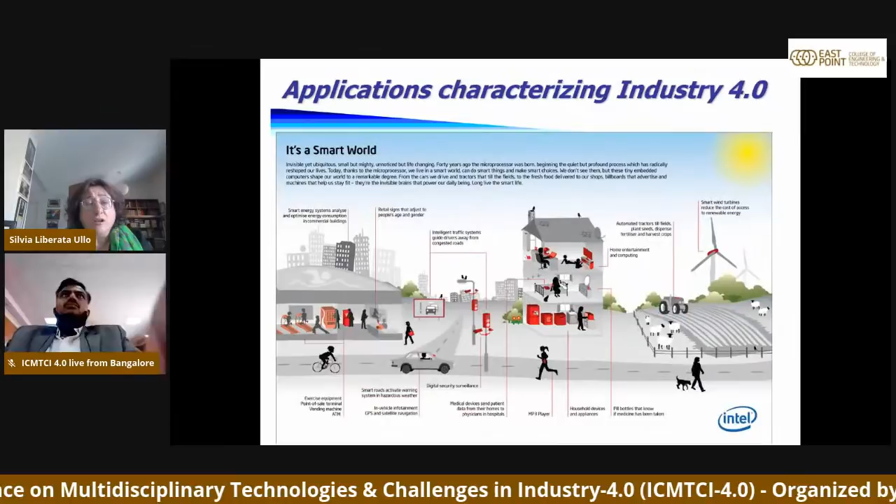Other software like R were also used, along with particular programming languages like Python and others. But what's important to consider is that data analysis was no longer possible with traditional processing tools, related to the applications which characterize Industry 4.0 and related to the smart world and smart mobility, which I'm going to present in time.

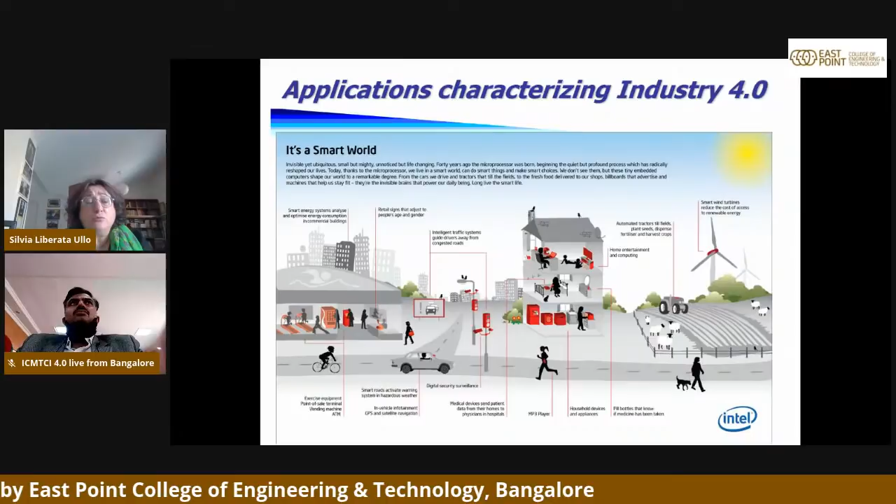How much time do I have for this last part? How much time do I have for this last part?

When I have to finish, okay, I go ahead, I don't hear anything.

This case study related to smart mobility presents the NetChip paradigm, a mobility network connected through a CHIP architecture. CHIP stands for Connected, Heterogeneous, Intelligent, and Personalized.

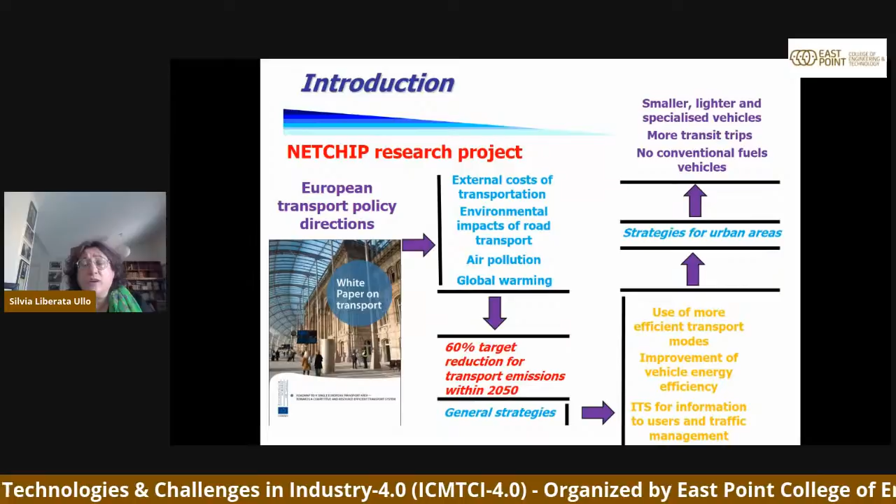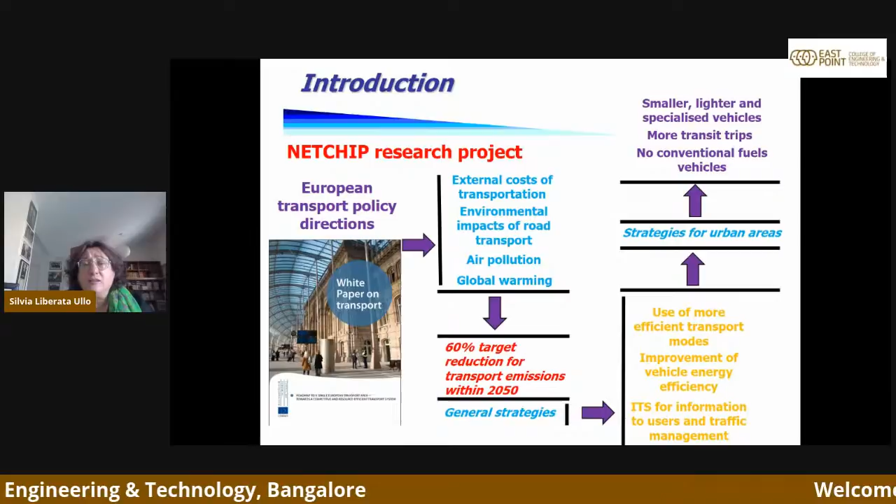The final result of this project was to identify the necessity of smaller, lighter, and specialized vehicles, besides identifying more transit trips that are flexible, and the necessity to use non-conventional fuel vehicles.

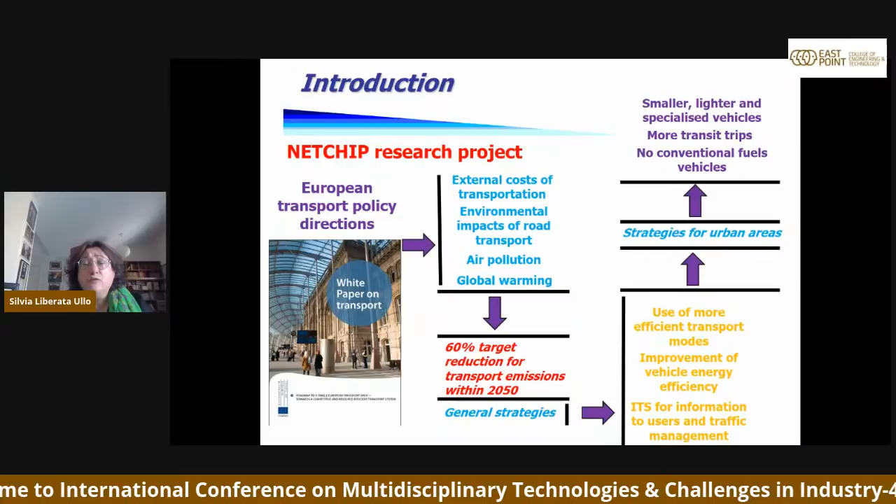This NetChip project is all focused on smart mobility. The idea was to propose an innovative transportation system based on the concept of Mobility as a Service, MaaS.

The system is based on small road vehicles without fixed paths and schedules, which will be adapted in real time to satisfy customer requests, considering also traffic congestion and the availability of other transport services, with the possibility to share or not the trip.

Just a second, because I'm reading a message. I think that I have less than 10 minutes.

So I'll go through this slide to the motivation of this project. It was based on a public transportation system, on small and low emission vehicles without fixed routes and schedules, and the possibility to share or not the trip.

The user can request the ride through a mobile application which gives his or her location, and the system will provide the service considering all user requests, vehicle availability, intermodal opportunities, and traffic congestion.

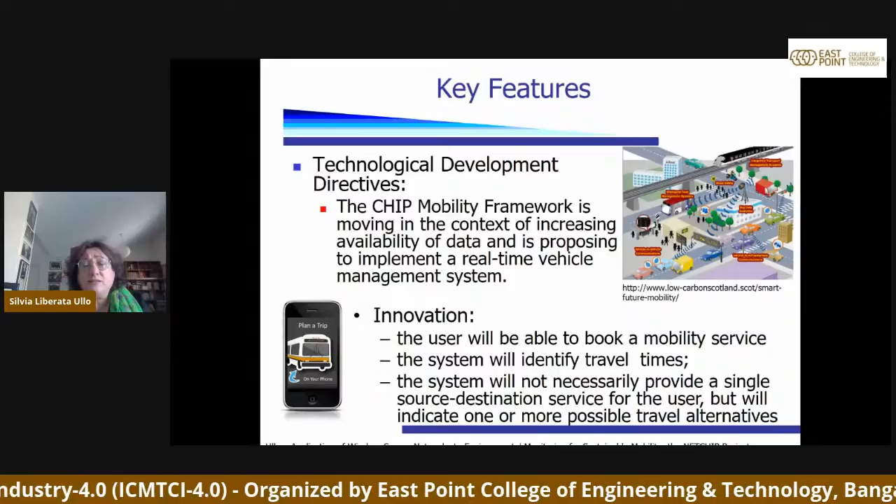So this is the CHIP framework, and the key features are related to the innovative part: the possibility for the user to book a mobility service, a system able to identify travel times, and a system that provides not a single source-destination service for the user, but more than one possible travel alternative.

This is all the functional framework, but I want to go a bit ahead to show something very important. The main challenge of collecting all this data from a large number of different and heterogeneous sources was related to big data analytics and machine learning techniques.

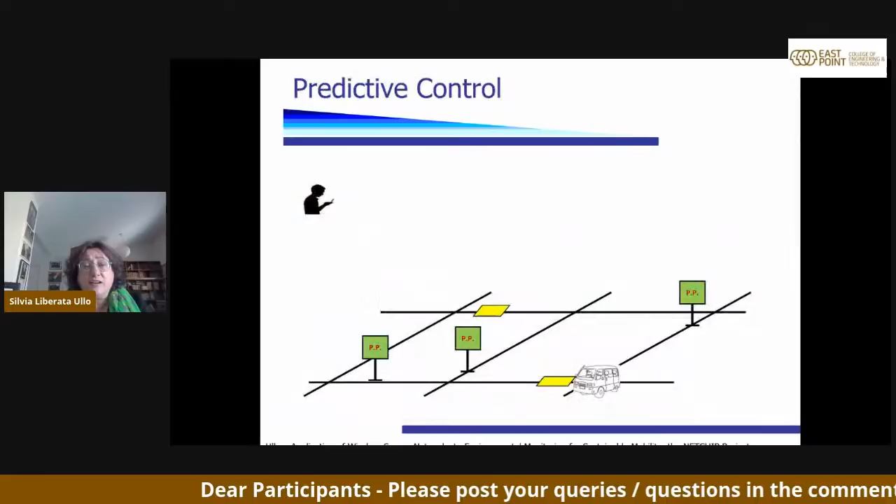I'll skip some slides. This is the way in which we simulate the model - this is a request. The user goes to one of the parking positions, waiting for one of these small trucks, and the small truck is moving on a specific pathway depending on the traffic and all the information. At the end, the truck will reach the user. These are the positions of this kind of sensors, in this case for pollutant and traffic monitoring.

These are all part of the work package - I'm going to skip this. I want to highlight what was clear from the final conclusions coming from these micro and macro traffic models, from the artificial neural networks used in the project. Some were completely developed from zero, and through the dynamic routing algorithms, it was possible to highlight the importance of flexibility, of using small trucks, and satisfying the user's requirements.

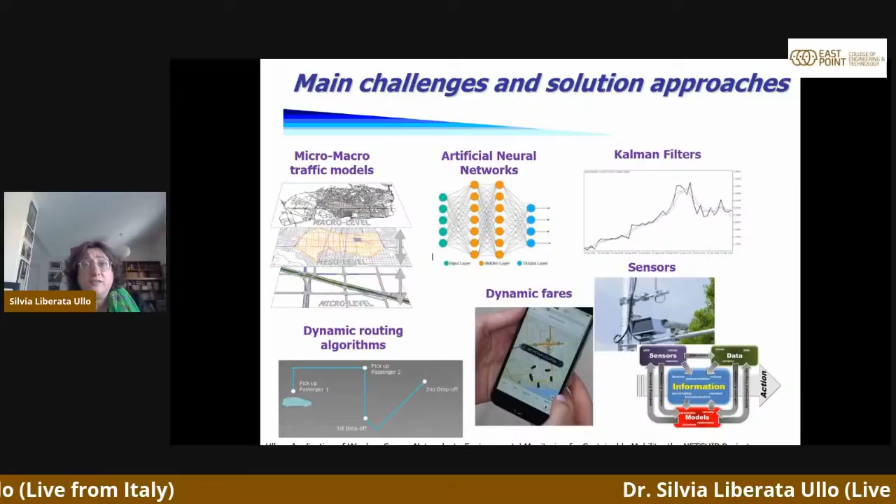We had to put together different skills and backgrounds from researchers at the university. The project had to follow the direction given by the European Union, so it is specific to the country where it must be applied. New architectures for Industry 4.0 will be able to catch data from wireless sensor networks, store and manage data in cloud systems, and generate necessary output information. Many issues and challenges are data security, device functioning, the control of failures, and so on.

The biggest result in this specific case study of the NetChip project that I presented is related to the identification of flexible routes and small vehicles to be used. I'm highlighting this part because I want to leave this last slide with these observations to discuss together.